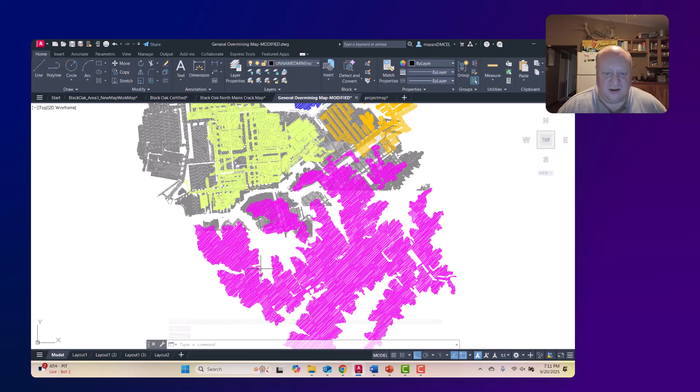This map here just shows a bunch of different mines stacked over top of one another. Some are adjacent to each other. We have longwalls. We have room and pillar. We have old areas that were hand loaded and longwalls over top of each other, right? So look at this area. You've got longwall panels that are at an angle.

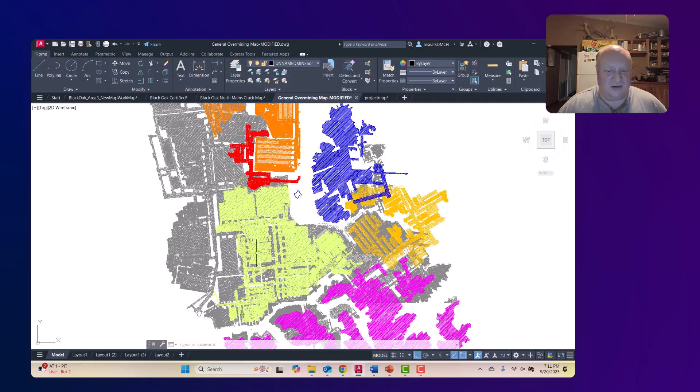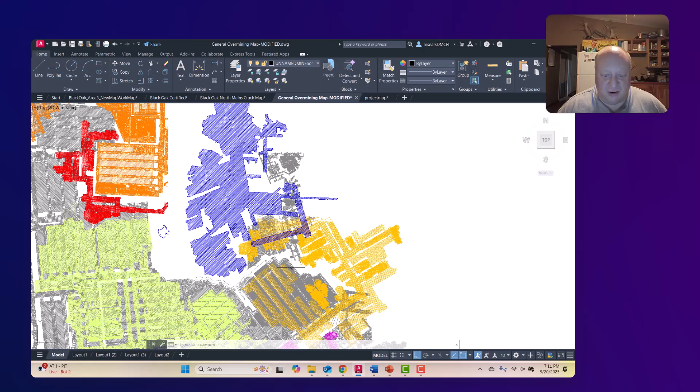So this is a really good example of what we are mining in and around in southern West Virginia, eastern Kentucky, those areas where multiple seam mining is regularly practiced. Okay, and here we see pillar recovery. Some areas you might see split pillars. There's just a multitude of things that you can run into in a situation where you're mining in areas like this. At one time, my dad said that this was the most difficult mining conditions in the world.

And, after a few years of working in it, he might be right. I know the Chinese are doing some crazy things at crazy angles, and the Germans have mined to 5,000 feet under multiple seam conditions. But, at the same time, the way this is laid out, the way that we have traditionally mined in this country, we mine the best first, right? It doesn't matter if it's over top of or underneath of other seams, you're mining the best first.

Also, you can run into situations where over and underlying mines aren't owned by the same company, right? So you've got two different companies working in two different seams above each other. And that can make things very difficult because you're not really on the same page. And it's much better if you are, right? But those situations do occur. Yeah, I've seen it before.

So, getting back to sort of the history of research in this area, like I said, Dr. Peng, it started there in about 1986 or so, or at least with graduating his first student. And that sort of set what I call the Peng dynasty of ground control in coal mining at West Virginia University. And that sort of legacy continued.

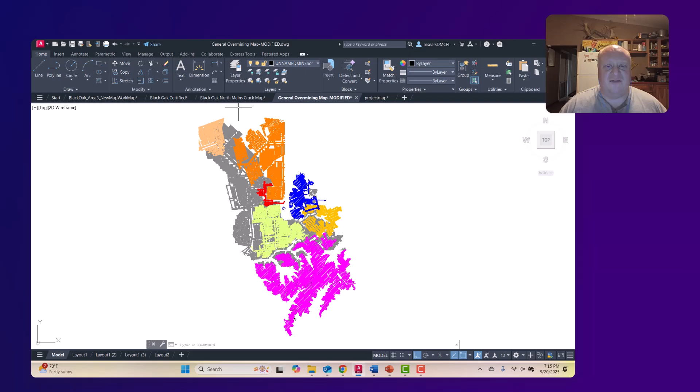So with that, I want to move on to another subject that we didn't talk about actually. I made it as part of the discussion post. It's about mining over a longwall panel, and sort of the periodic weighting and the fracture zone and that sort of thing. And sort of where that came from was in this particular mine that I was working at the time.

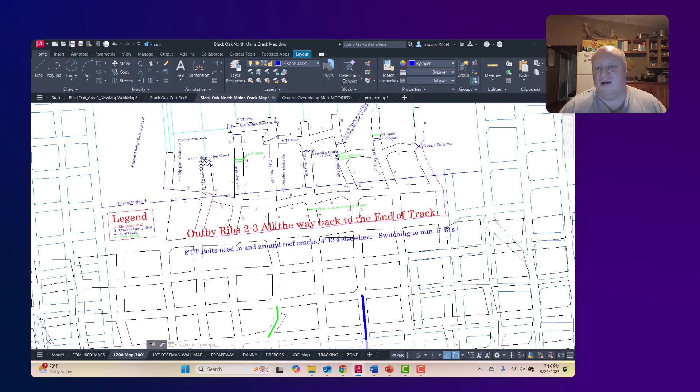We were getting ready to mine over a 1,000-foot wide longwall panel in the Eagle Seam. And so we're close to 200 feet above it, 180 feet or so. And when we started out over the edge, we had elevated stresses here with the barrier underneath us. So where all this was mined out, you get abutment loading on here, and we saw it. You can see rib conditions on a scale of 0 to 5, some of them hitting maybe a 4, at least for this mine.

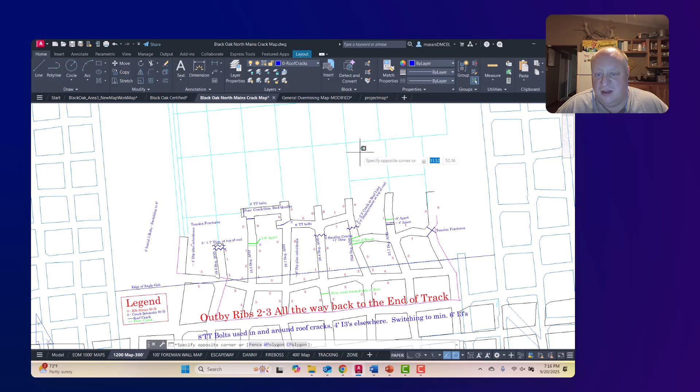And then once you get out over the gob, that stress kind of goes away for the most part, right? Because there's a de-stressing in here, particularly around the edges of the panel where it's the most extreme, right? And so you see that the rib conditions got a lot better. A lot of zeros, a lot of ones, that sort of thing.

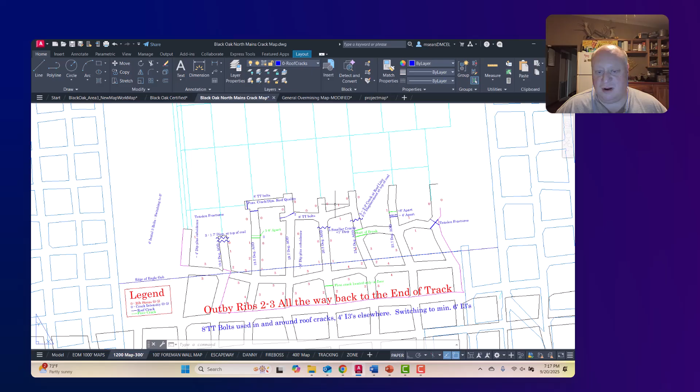But what you see is we started seeing very large fractures in the roof. And so what was going on here is we had a very thick sandstone that was down on the coal. So those tension fractures, what they are, is this area was caving when the original underlying mine was coming through. It fractured this roof. And unfortunately, I did not get to track this any further, really. I ended up leaving that position and going somewhere else. But with that said,

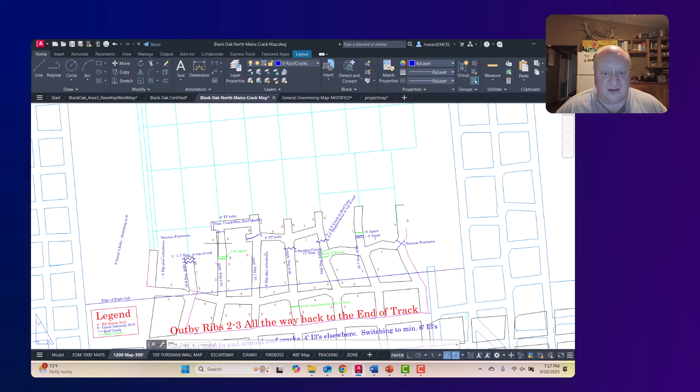my theory was that as they keep mining through here, these very large fractures, several feet apart, maybe 4 feet of spacing, sometimes more than that. Some of the cracks were smaller. There was also displacement noticed at the top of the coal seam. So here 1.7 feet. So there was actually evidence of the subsidence itself at the top of the coal that you could see.

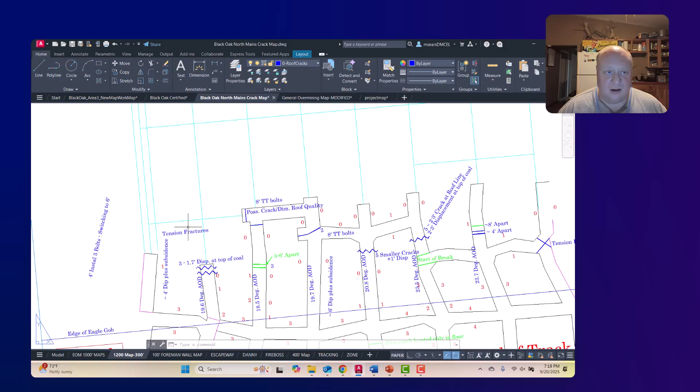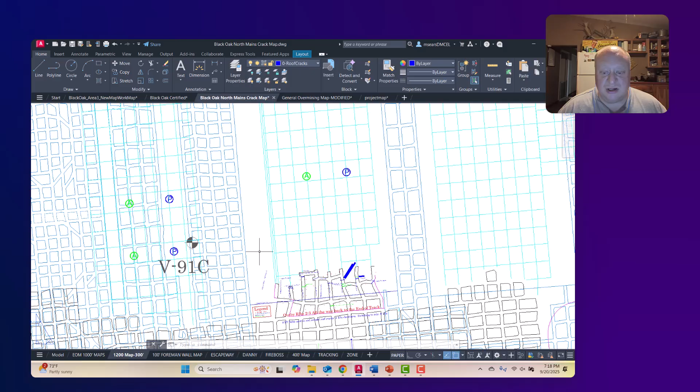So obviously they started getting some longer bolts, right? They were putting in a lot of 8-foot torque tensions. Also switched to some 6-foot point anchor resin assisted bolts. And so I didn't get to continue this mapping project, but like I said, my theory was that as they would advance, you would re-see these groups of fractures in the roof, and it would be based on what the periodic weighting of the original longwall was. And so that's what was happening. Even this distance up into the roof above that longwall panel, you're still in the fracture zone in this case. So I wanted to point that out as we had a discussion post about it.

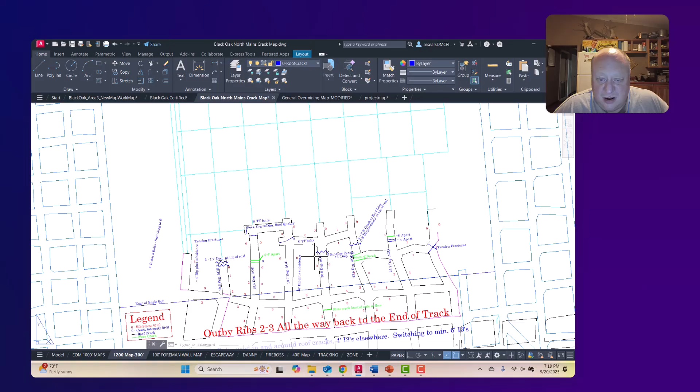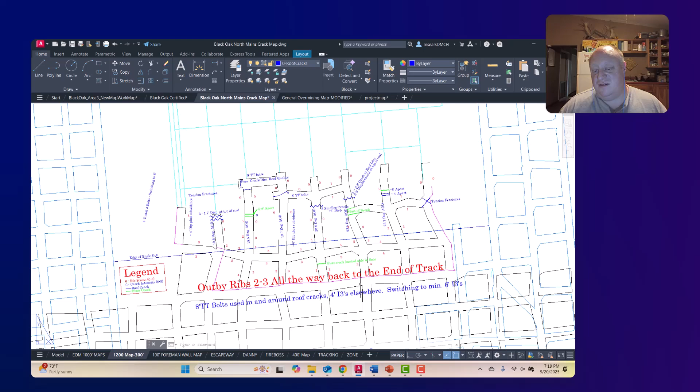And that's what my thought process was on this, so once you start over in this area, you're going to need to, even back in here possibly, because if you can imagine this, you're looking at plan view, you're looking at the top down. If you can imagine those flat-lying layers bending over this solid boundary, you will also get tension in the roof over in this area, so you may also need extra roof support back here too.

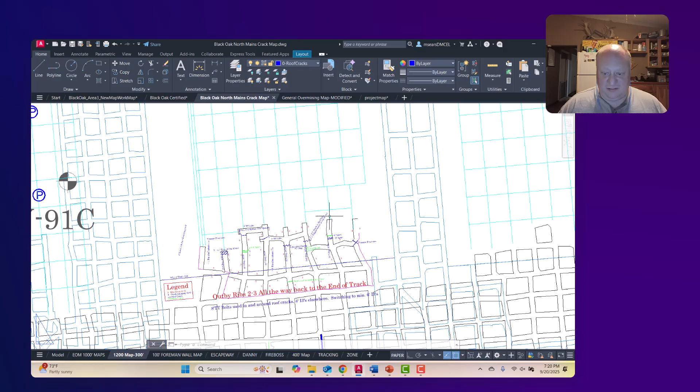So just keep that in mind if you're ever in this scenario, that once you're mining over subsided terrain, you don't know exactly what you're going to get. You are going to need a pattern of supplemental support, which we'll talk about. Okay. So I think that's enough of an introduction to the area as a whole, and how it's historically significant in the way we do, particularly, ground control engineering in this country.

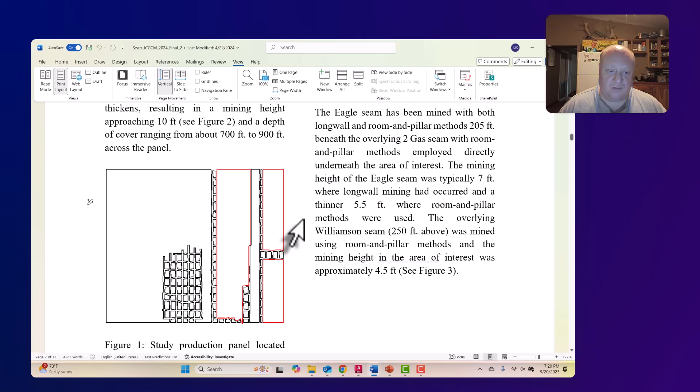Now, for the project itself, what gave me this idea was that, let's say 11 years ago or so, when we were working in this area, we had driven a panel. It was our third panel off that set of mains. And we started driving it up. And what we experienced was some very significant squeezing. The right side of the panel was de-stressed and looked really good. The left side had very large amounts of material coming off the ribs. There was floor heave. The roof stayed up good. It looked good because it was very strong. But we were experiencing floor heave in that area.

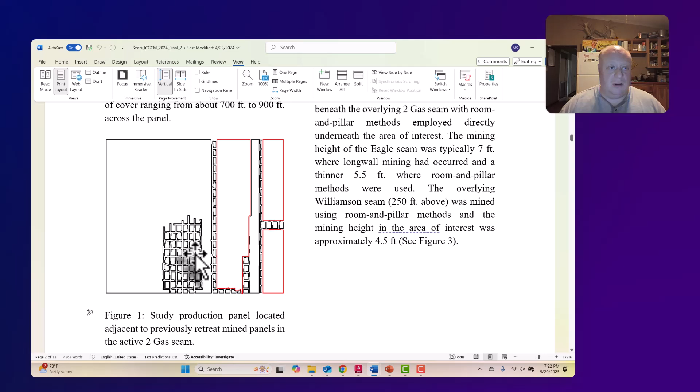And I'll tell you, it sounded like you were in a pillar section or you were in a longwall mine. Okay, so it was very noisy, seismically speaking. You could hear the rock breaking. You could feel it too. So it was events that were large enough that you could feel it in your feet. And so I knew immediately that what was going on was not normal, and that what we were experiencing was fracturing of a thick piece of strata, either in the roof or in the floor. In this case, it could have been in the interburden. I don't know, but our guess was that somehow we were actually actively subsiding the area.

And so with that, I did a bit of a study on this. And to show you a little bit how complicated this was, you have the 2 Gas workings here in black. That was our panel, right? The previous panel beside it had been retreat mined. It's outlined in red, that gob area. Overlying the seam, we have the pillars in blue and the gob areas in orange. So we have gob solid boundaries right here where we know we're going to see, not necessarily excessive, but elevated abutment loadings that transfer between seams, right?

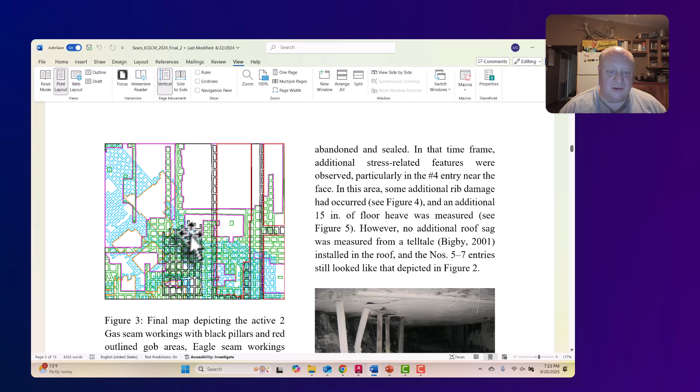Underlying this mine, we have the pillars in green. So you see a lot of this has been room and pillar, full extraction sort of mining with gob areas in magenta. But what you see here is that there are pillars here underlying this area, and some over here as well. So if you look on the left side of the section, this is a lot what the conditions looked like there. A decent bit of rib sloughage.

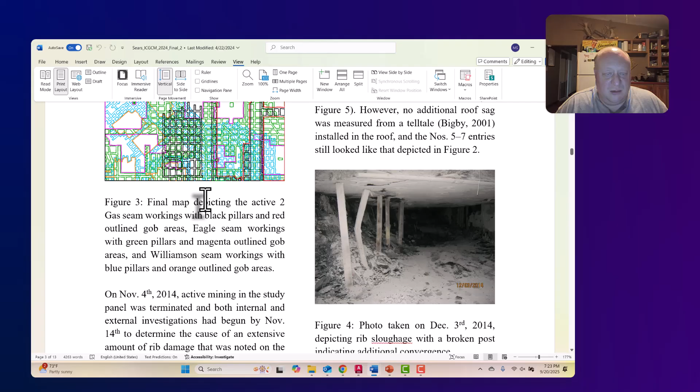You see this post is broken. That's sort of what we were looking at. But like I said, it didn't quite match up with the traditional route of modeling that we would normally do. We didn't expect this to happen. We thought things were going to be okay. They obviously were not.

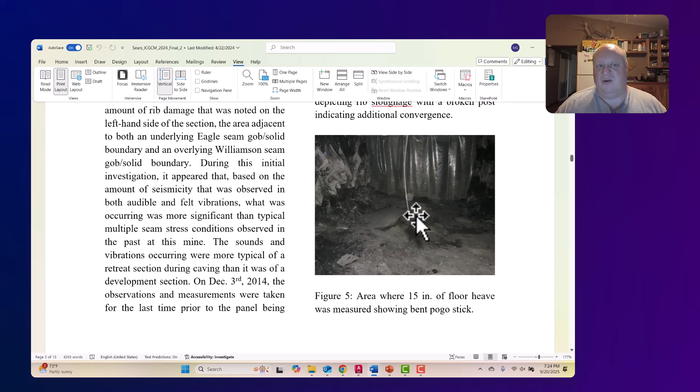Here's another image of 15 inches of floor heave that was measured. You can also see how sloughed off the ribs are and how jagged they are in this area. That's not a lot of floor heave, but this was measured over the course of a month, so it was still moving. That's what I'm trying to say. It was still moving at December of 2014.

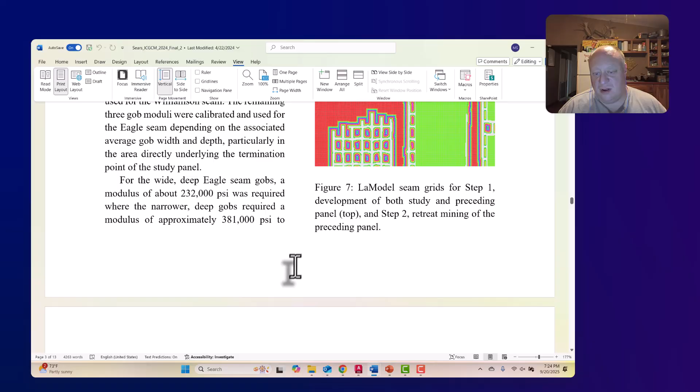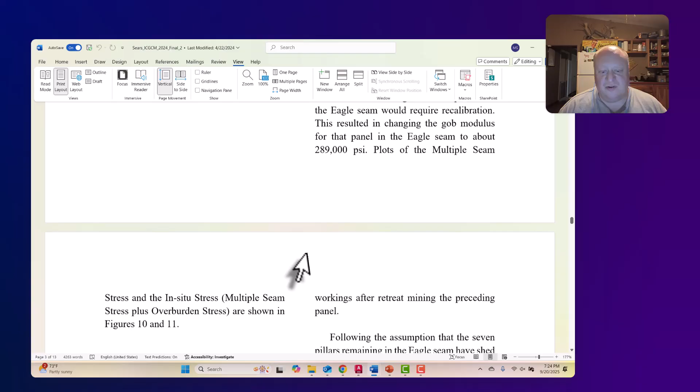So I ended up doing a lot of model analysis. Long story short, I showed that by retreat mining the adjacent panel, these underlying pillars may have seen additional movement, and that there were also additional pillars in this area that had safety factors that were so low that they had most likely failed. And instead, what we were looking at, it looked something like this, right? Instead of what we had before.

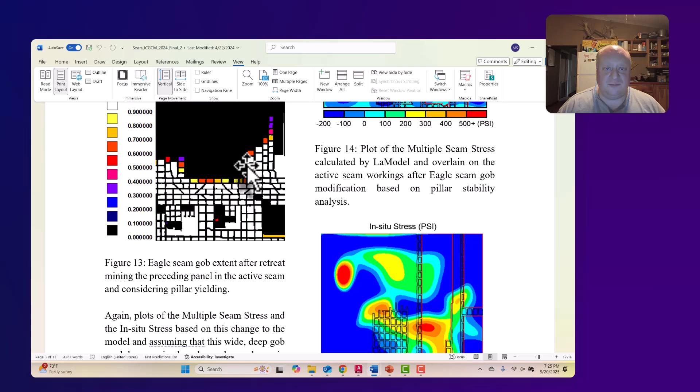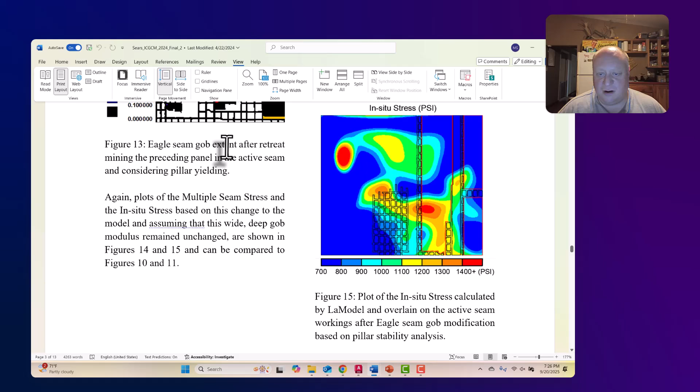And because there was additional pillar failure in this area, it is reasonable to assume that there could have been additional displacement as well, and that's what we were encountering in this situation. So, long story short, we did have to abandon this panel. We sealed it off. And so with that, this is where I got the idea for the project. But I also didn't want to make it as complicated as this. This is a LaModel analysis, numerical modeling. I want to take it back a step, but this is where the idea came from.

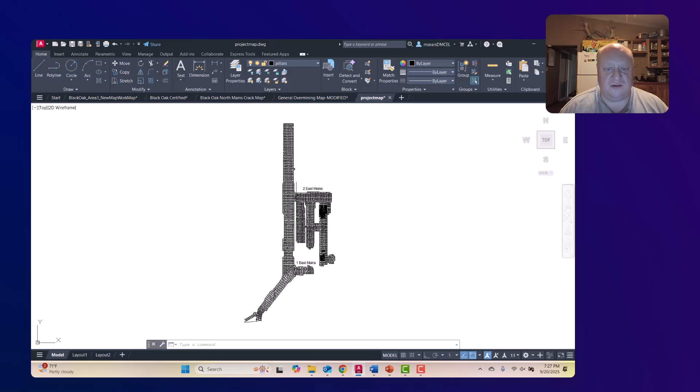So let's go back to the project map, and we'll go over that a little bit, and then I will get a presentation or a document put together with all the other input parameters that you're going to need to know, right? So here's what we have. We have a mine that exists. They're advancing the north mains here to the north. That's why they're called the north mains. We have one east and two east mains here, and mining has finished up off the two east mains. And for that miner section, the company wants to bring it straight across and start mining one west. Okay. However, like I said, there are a few things going on.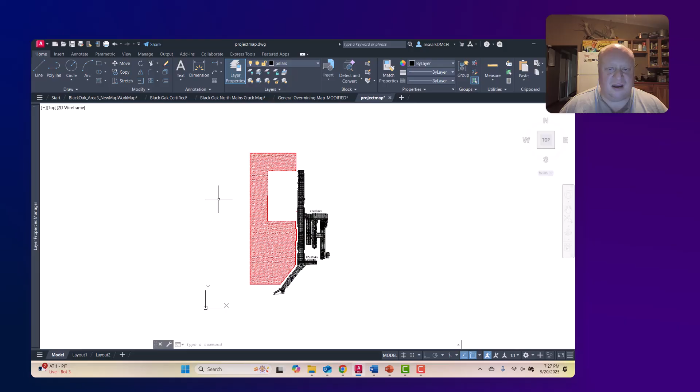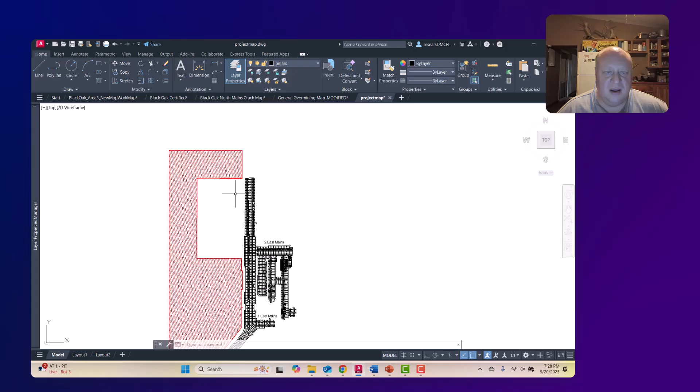So let's open up our layers tab here. And the first thing I want to put in is some adjacent workings. Okay. So there is a mine to the left, and it's in a strange shape, and that's okay. I primarily did this because this is the area I want you to focus on. I want you to focus on laying out panels in this area, and also taking into account that we have to stay 200 feet off of this adjacent mine. So it's limited. Our border, our boundary, our geometry, and I also have some overburden contours.

And you'll see in this area, the deepest it gets is just over 1,000 feet. Maybe right in the middle might be 1,050 or so. But it doesn't quite get to 1,100. So that's what we're looking at in this area.

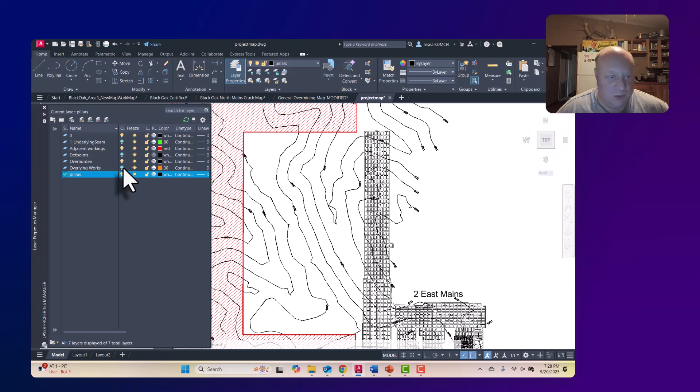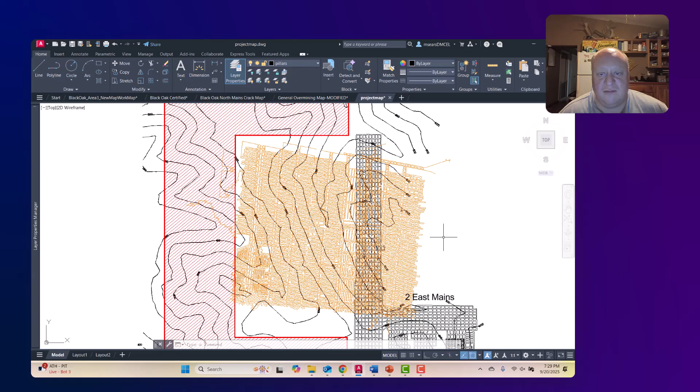I'm going to go ahead and turn on the overlying workings, and don't get scared. So this would be an example of something that you would see kind of up on a hilltop. I did not really take into account the topography on this, and I just dropped it right in just to throw this in for the project, right? So this is going to be an overlying seam that is about 400 feet, we'll say, above the active mine workings that you'll be laying out and projecting.

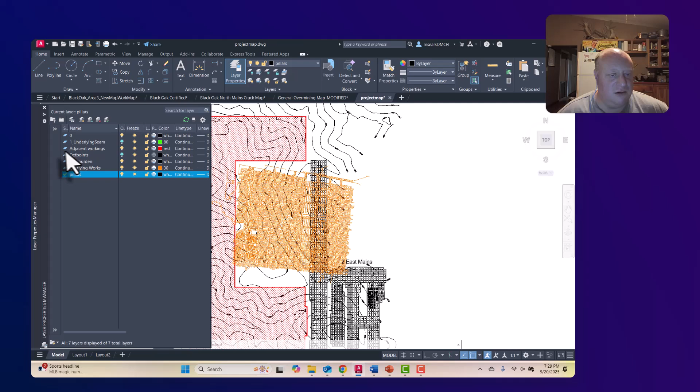So that's in here. I will discuss this even more as we go along. Just like we were doing in the surface mining class, we're going to be basically going through it together as we go. But let me turn that off for now so that I can show you the more important part.

And that is the underlying workings. So, prior mining in the underlying seam, and you can assume that this goes on in other directions as well, out to the east or something like this. But I've only drawn it in for the area of interest here.

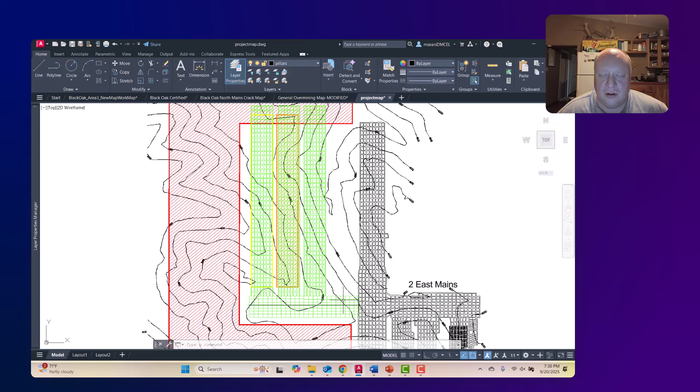And so what we're going to be doing is designing the pillar size for the one west mains, and we are going to be laying out 4 panels to the right: 1 right, 2 right, 3 right, 4 right. So this gives us time for 4 different scenarios, right? And so we have our first panel.

Because of the way I drew this on purpose, there is no underlying mining, right? So there's nothing there. The second panel has room and pillar development with a large block size, where these pillars are 80 by 120 foot centers. This would be equivalent to maybe mining over a set of mains, or a panel that was going to be retreat mined and they ended up not retreat mining, something like that.

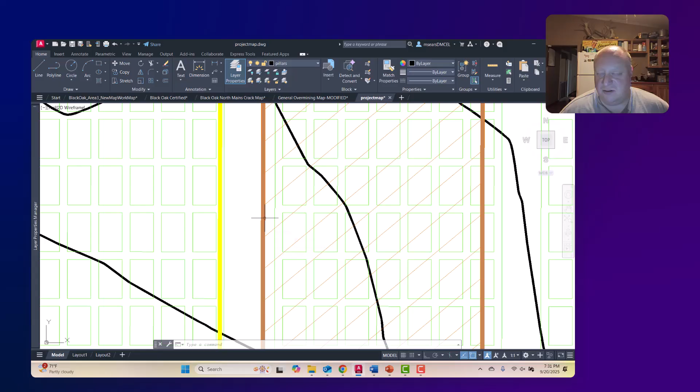The next panel, hatched in this orange color, has been fully retreat mined. There are two barrier rows in the back for the bleeders. I didn't connect those in, but like I said, this is a little bit fictitious. So this is fully retreat mined. They did take a 30-foot slab cut on the left. Half a block is remaining on the right. And then also two barrier rows at the mouth of the panel as well.

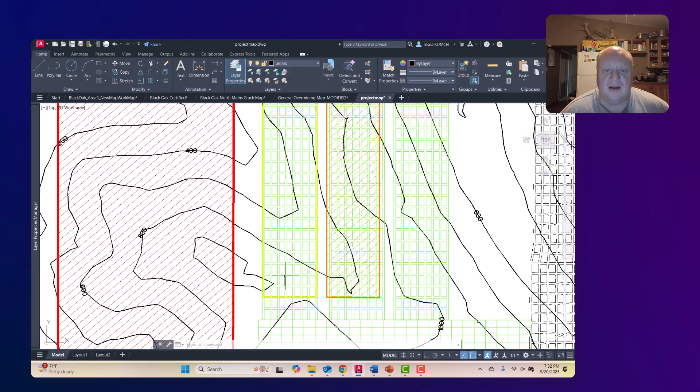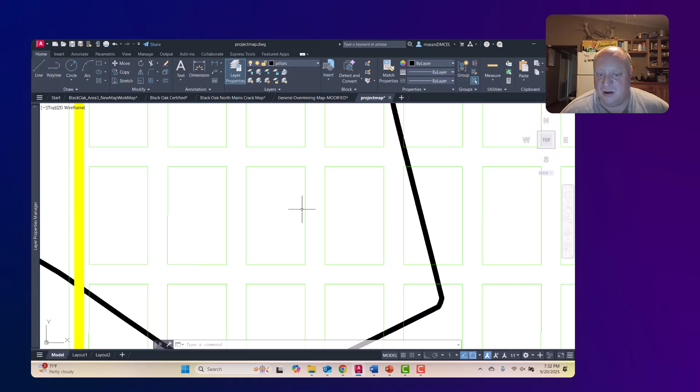Right. So the following panel, I didn't hatch it in either, but it's outlined in yellow. And for this panel, number 4, or 3 in this case, but 4 for our panels, we're going to assume that these blocks have actually been split in the middle. So this is like a partial pillaring. We'll basically just assume that these blocks have been split in half across the middle, and then we'll be mining over top of it from there.

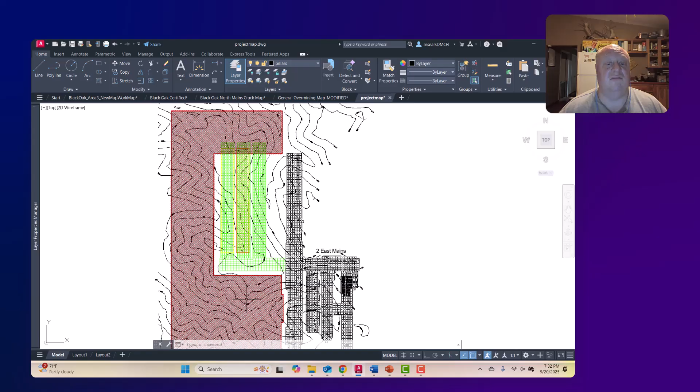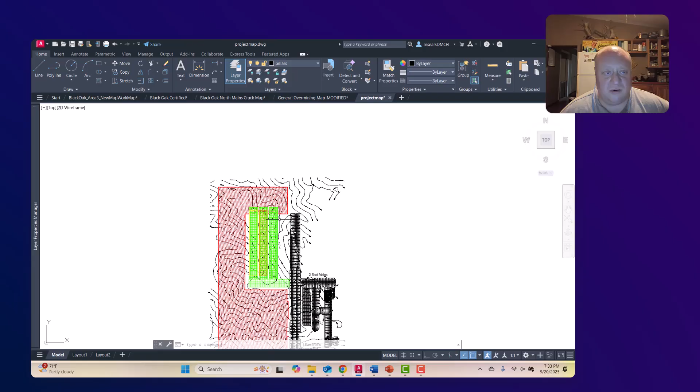So, the thought process for this, especially when you're just starting the layout, first things. This is probably the most important part, right? Checking out what's next to you, seeing what area you've got to work with, checking out what's above or below you, in this case below us, and taking it step by step. And like I said, I'll be introducing additional software. We'll be using ARMPS to design the pillars, that sort of thing.

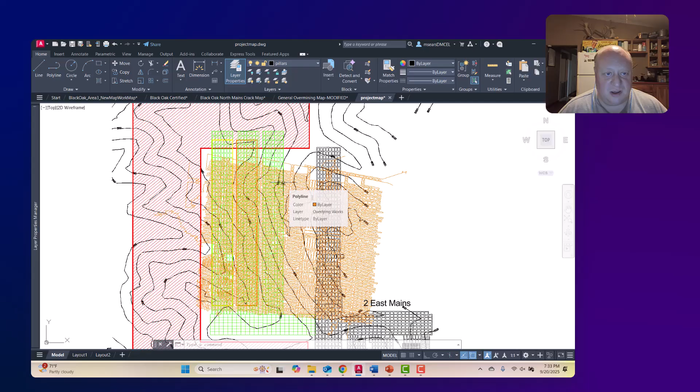And that's where we are right now. Make sure I've got all the layers covered. I do. We can put the other mine map in there as well. It looks kind of crazy, but we're going to work through it and come up with the best design we can. Next time, I'm gonna make printouts of these as well, both 200 and 500 scale is what I'm planning. This might be large. It's a long way back to here, but anyways. I'll try that on different scales, and if it doesn't work out, I'll get back to you.

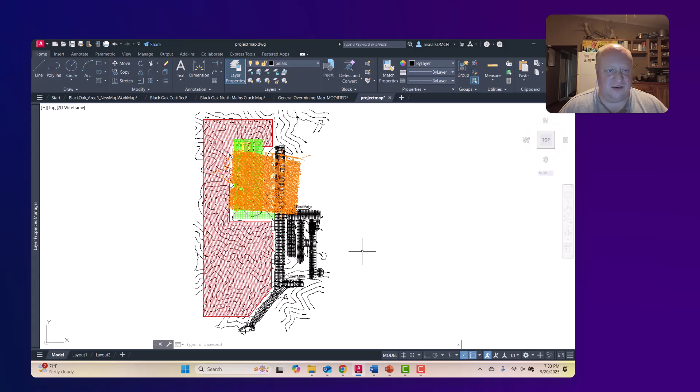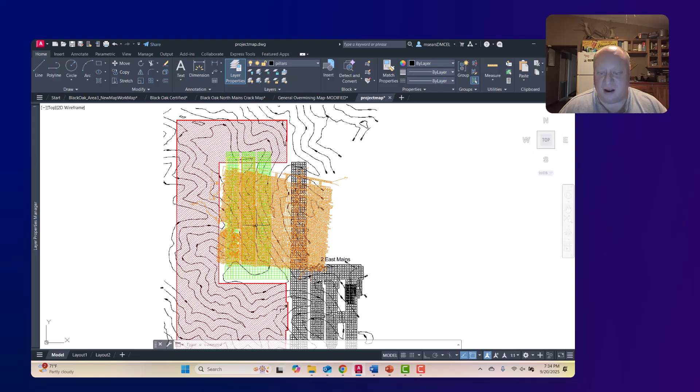In the meantime, I'm going to be putting together a couple little presentations with all the details for both projects. I will show you a potential reason for why coal might be left like this, and we're going to go mine it now. There's a number of reasons why it might have been left. It might be thin. It might have a parting. Might have bad roof. That is the case here. This is the kind of coal section that we're going to be using for this property.

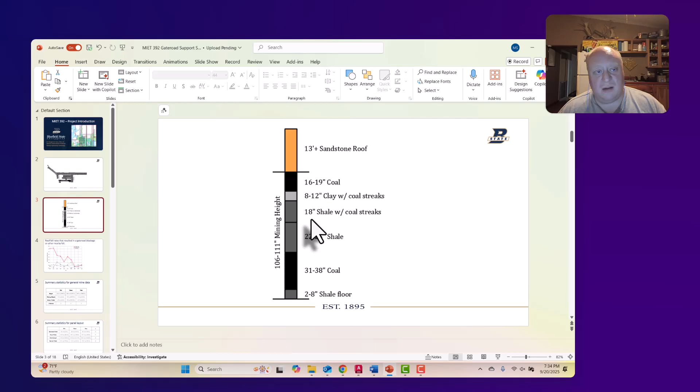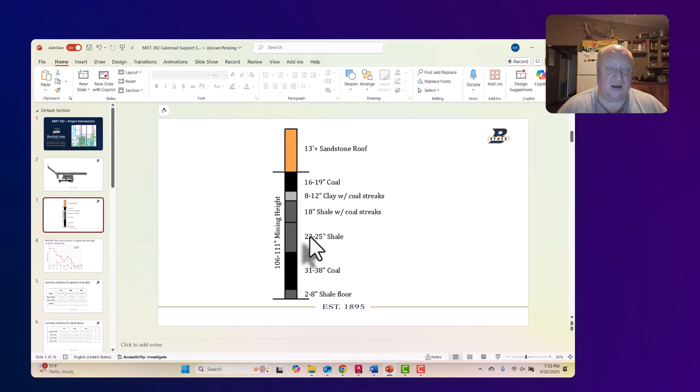It's got a very thick parting in it, and I'll be discussing ways that, depending on the rock, you may or may not be able to use this to your advantage, and I'll show you how to determine if you'll be able to do that or not as we go. But this is what it looks like, and that's why it was left behind. There's not actually all that much coal here. There's a lot of rock, but this is common in the region. So with that, that's our plans for the project, and we'll see you next time.